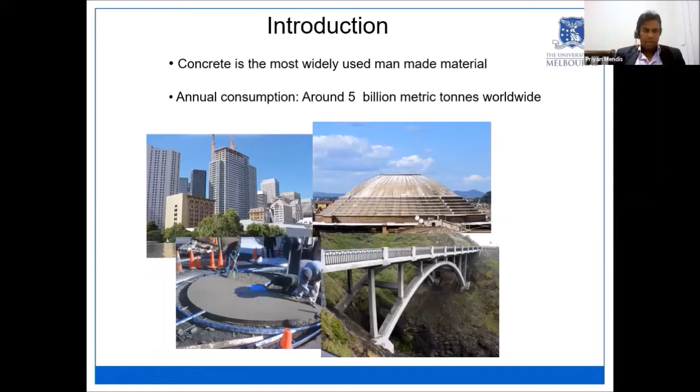Those who have visited Melbourne, that's a bit of the skyline. This changed a bit over the years, with a lot of tall buildings being built. I was quite fortunate to work on a number of tall buildings in Melbourne, and a few other experiences as well.

My introduction to high strength concrete came as a young engineer, when I had the opportunity to work with Ken Day, who was very close to Sri Lanka, having visited there a few times. I still consider him the best, practically the one who was practicing the best concrete technologies in the world. Unfortunately he passed away, but he wrote a book, Ready Mix Concrete - if you have a chance, read that. He taught me a lot of things about concrete technology.

With Petronas Tower, I wasn't heavily involved, but he got me involved, and that's how I came to work with foundation concrete mixes. So my introduction to this technology came a long time back. I was very fortunate to be working with him. Up to 80 MPa was used in Petronas Tower, one of the initial introductions of high strength concrete.

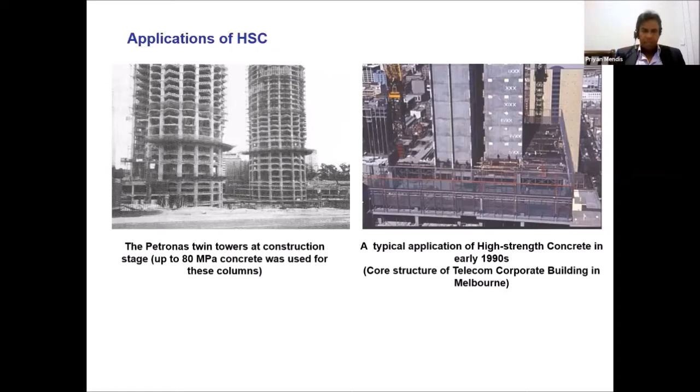In this case, I want to mention that in the 1950s... anyway, coming back to this - my introduction to Eureka Tower, I was part of the team. Although I was at the university, I was part of the Eureka team, and we designed concrete mixes and many other things. The developer was the concrete company, Grocon.

So we could really try out a lot of things there. This was another one of the first to really use this commercially. We can do it in the lab now - I've produced 200 to 400 MPa in the lab. That's not a problem, but commercially producing it is the issue. That's where I think we have done a lot of work as well.

Can everyone hear me? Yes, we can hear you. I think it was muted. Now it's okay, sorry. Yeah, sure, thank you.

I'll keep going. For Burj Khalifa, 100 MPa concrete was used. I'll share these slides so you don't need to take down anything - I'll pass them to Dr. Pradeep and Mr. Nandana. The 100 MPa microsilica self-compacting concrete was used a long time back for Burj Khalifa. I'll leave the details if you have questions, we'll discuss later - I know Thushara also has a couple of slides on the Burj Khalifa.

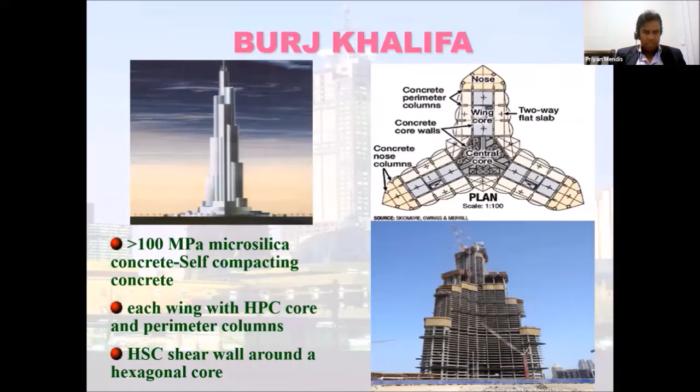My work was mainly being part of the team designing these columns, very high strength concrete columns, designed for about 80 to 100 MPa, but the actual strength measured was about 140. I'll briefly touch on the design methods used there.

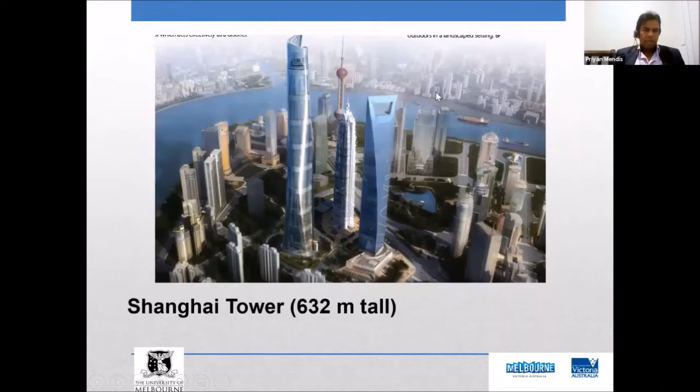Shanghai Tower was a key one, the second tallest building in the world at 632 meters tall. We worked with Shanghai Construction Corporation - Mr. Dong, my good friend, was in charge of the whole project from Shanghai Construction Corporation. This is a twisted structure, 632 meters. We had a project on pumping concrete together, more of an R&D joint project, and that's where it topped up at 506.9 meters - I was fortunate to be there.

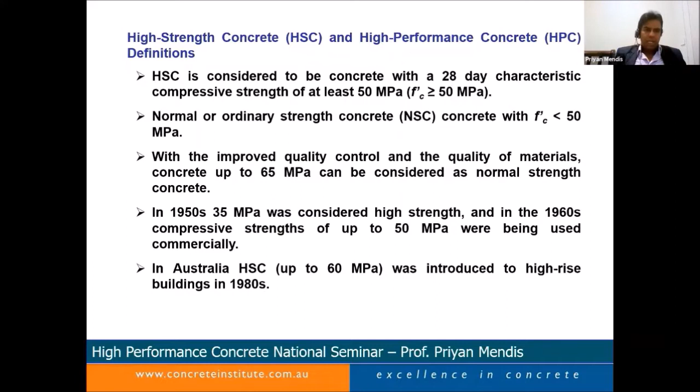So high strength concrete, again, the goalposts are changing now, but this is a nice definition. Compressive strength more than 50 MPa is high strength concrete, very high strength is 100 MPa, normal strength is less than 50 MPa. So we're talking about even ultra high strength concrete. Dr. Thushara also has some slides on that. Ultra means we could be 150 MPa, 200 MPa. So there's no really rigid definition for ultra high strength concrete.

It's really, let's say, very high strength concrete beyond 100 MPa. Our code changed to 120 MPa. Now, that's something I led a committee in Australia to change the code in 2000. We went to 65 MPa in 2001, in 2009 we changed it to a little bit more than 100, and then 120 is in 2018. Now we are even going beyond that. I think the Australian code is the only one covering very high strength concrete. The American code doesn't have any strength limit. So the same code can be used for all strengths, but that's not been modified for high strength concrete.

ACI 363 committee is the one - I attended sessions this time in America - that's where the high strength concrete committee is. We discussed a lot of things in that particular committee, so I can talk about the world scene that way.

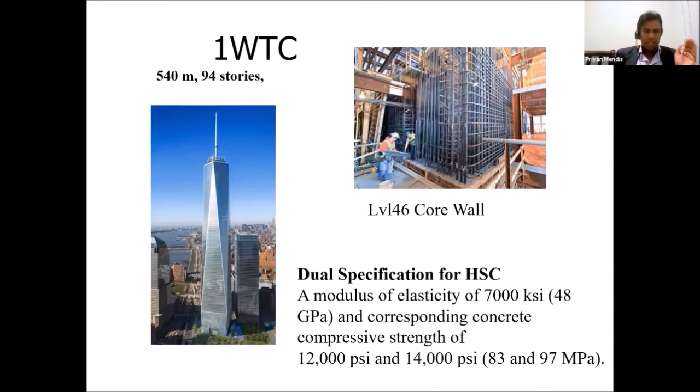We are looking at - I'll skip this definition a bit, I will share that. Anyway, don't forget about the basic knowledge, I'm not going to go through this. Think about good aggregates, transportation, mixing - that is vital for high performance concrete. Don't forget about the basics. Always think about concrete as a material, cement and water mix, paste. Paste is like a glue, gluing the aggregates together.

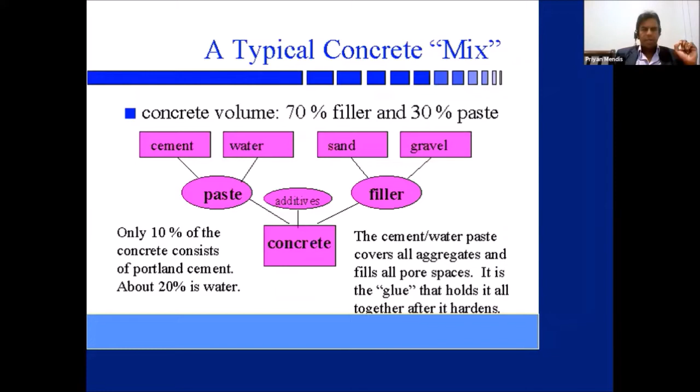And then you will understand how to make very good high strength concrete, high performance concrete. Look at the basics - this is where my first lessons of concrete come in. So just remember, cement paste is there, and superplasticizer is an ingredient which is really one of the best inventions of the last century in our construction area - the superplasticizers - and that will really help with these pozzolanic admixtures. What are pozzolans? They will add to the equation. I will not go into the technology equations, we are just briefly covering this.

Pozzolans means it will really have the SiO2, silicon dioxide, mixed with the calcium hydroxide, a byproduct of the concrete hydration reaction, and make a bit more CSH. So that is what pozzolans are - the pozzolanic reaction. So when you have pozzolans, my advice is always use superplasticizers as well, because that really will add to that.

Now there's a good question asked by Mr. Priyant, a structural engineer - how can we contribute to sustainable development goals? So yes, very much sustainability is coming in a big way.

I will talk about sustainability in two ways, though I'll be very brief today. We have to understand sustainability coming in two ways. One is where we are using waste materials, even fly ash, slag, silica fumes, waste materials in concrete. Every concrete now will have a fly ash component, in Australia about 20-30% fly ash.

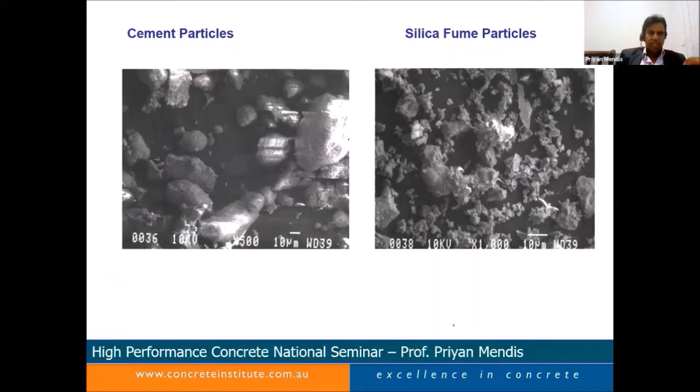Now, think about cement particles - silica fume particles are very small. So to make high strength concrete beyond about 80 MPa, it's good to use silica fume type of material. They are all byproducts, waste products, and smaller than cement. Fly ash can be slightly bigger, but it depends on the properties.

This is a very quick one where I want to allow Thushara also to talk a bit more - ease of placement, compaction, early age strength, long-term strength, permeability, modulus of elasticity, shrinkage, creep. I'll give some examples very quickly from my experience, to show that high strength concrete is not the only thing.

I was asked to help with the Commonwealth Games pool in Melbourne at that time, with the diving board. When it was designed, I helped them put in 65 MPa concrete a long time back. That was just to get the modulus of elasticity so that vibration is reduced for that diving board. So it's not for strength that we used high strength concrete.

Another example is that I was, in fact, asked to help with the Sydney airport. Those who fly there will see a seawall there.

The seawall, it is not about the strength. Their requirement was to have 1,000 coulombs, the chloride resistance, durability issue. So it was designed for that rather than strength. Obviously high strength concrete gives better properties, but it is not just strength.

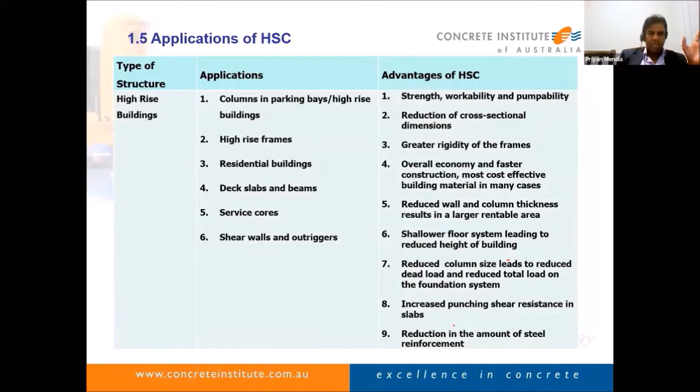That leads to the statement, don't read anything from here, but I'll just say high strength concrete is a high performance concrete. But high performance concrete can be many other things in this list. I'll share these applications, I'm not going to talk about all of that today. I've named applications of high strength concrete in many slides here. I'm not going to read all of that, but I will share these slides. Many applications we can think about.

That's where structural engineering comes in. Structural engineers are the ones who can understand, and of course other engineers too, it's extremely important to understand the applications. It can be bridges, especially high strength concrete columns in tall buildings. Remember, it's not just for that. Sometimes we use high strength concrete to reduce deflections, because the elastic modulus increases and the deflection reduces. So as I said, many other applications when you talk about high performance concrete.

I will not go into this, but pozzolanic materials are becoming very popular, sustainable materials. Even in the green building rating system in Sri Lanka, there's recognition for all that. I had to mention this metro tunnel, a big tunnel happening in Melbourne, big infrastructure project. In the specifications for the metro tunnel, they say 44% of the cement has to be replaced. That's where the world is going. You can't just say 'just using cement' anymore. Of course the cement companies are all supporting this change with blended cements and many other things now. That's where it's moving on the sustainability side.

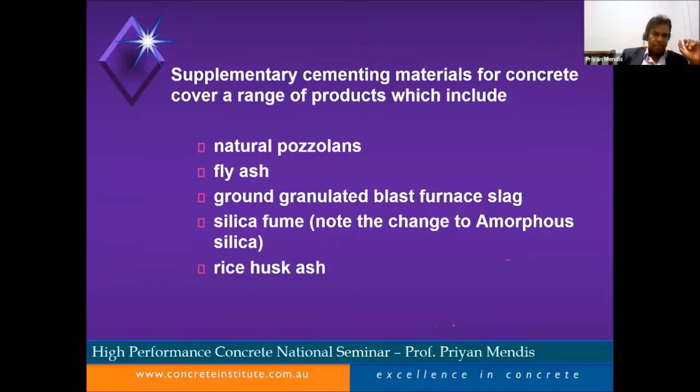Super plasticizers, I will not spend time on this. For example, polycarboxylate ethers came in, I'd say 15 years back, could be slightly more. But they are key for many things, new types of PCs. Again, superplasticizers are very key. On the research side, we do a lot.

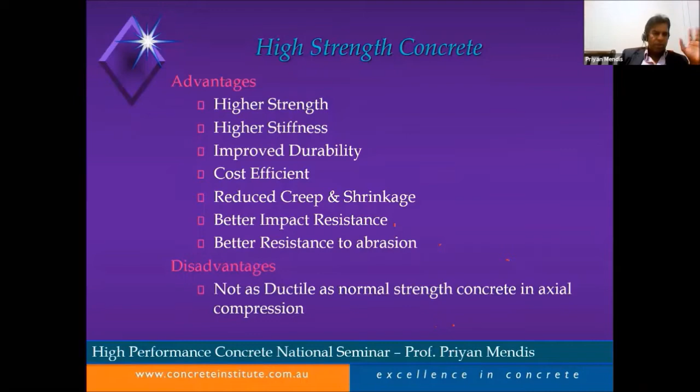High strength concrete, go very quickly. High strength, stiffness, durability, we can talk about a lot. But more important is the stress-strain curve: stress on the y-axis, strain on the x-axis. Only structural engineers can do this. If you think of the curves, they're parabolic and ductile for low strength. When it comes to high strength, they're very brittle.

So what do we do as engineers? When designing columns, we can put a bit more stirrups, lateral reinforcement, to confine the concrete. That will make it a bit more ductile. What I've done in Burj Khalifa and a number of other buildings is made some recommendations to reduce this issue. Since then it has come into the codes as well. I'm one of the first to come up with these design methods.

RHA, rice husk ash, is something I've done a lot of work on. I'm happy to even talk about it offline. The only problem with rice husk ash, that's why it's not coming to the world, is that it has to be ground and properly burnt. So it's a bit expensive, the processing. That's why RHA is not coming. Fly ash directly comes out as a waste product, so not much processing cost. But rice husk ash, you need to process it. That's why, although even at that time I did a bit of work for rice growers in Australia as well, rice ash is not popular.

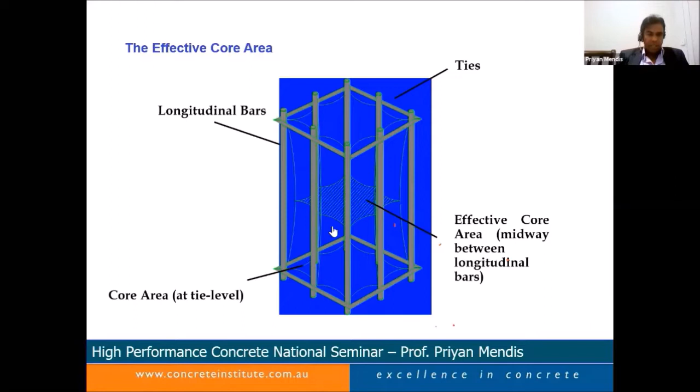So coming back to this, reduce the spacing between stirrups and you'll find improved confinement. That's where I am really improving the ductility. Stress on the y-axis, strain, and these are the confinement stress levels. When you increase the confinement stress, it becomes really more ductile. Having 1 MPa is where the stirrup spacing can be reduced. Practically, it's about 1 MPa.

I'll show you a reference where you can get more information on how to calculate the confinement stress. Refer to AS3600, the Australian code - that's the only code in the world that gives more detail. Model code, Euro code, also give a little more detail on finding this confinement stress. You can use the confining stress to design now - the design method is included in the Australian code as well. So if you want to design high strength concrete columns, look at AS3600. That's the best reference to do that.

Now, this is very early stages, before all the codes came.

Actually, very good question from Mr. Delina, asking does the confinement requirement increase with higher strength? The answer is yes, because it becomes a bit more brittle. At the moment, concrete strength is not considered to be a parameter for confinement - it's just based on the idea that more confinement is needed for higher strengths. But what we do is very crudely say beyond 50 MPa, use confinement stress at a particular level. So this does, of course, have the concrete strength factored in.

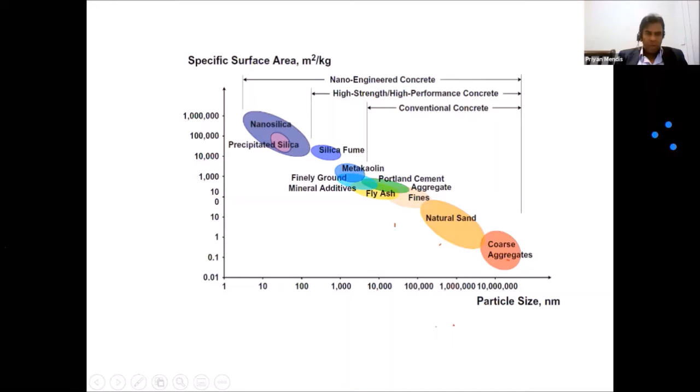I'll leave that to another time to talk about, and I'll skip some of those slides to really show why structural engineering is so important - why structural engineers had to be involved with everything.

This is some work we did - I was also part of it - around 96, 97, somewhere there, we started this reactive powder concrete, ultra high strength concrete, with no aggregates. Aggregate is a weakness, so as engineers we have to understand where the weak points are. Normally weakness comes around the aggregates, and that's where the weakness is. So that interface we call the ITZ zone, the interfacial transition zone.

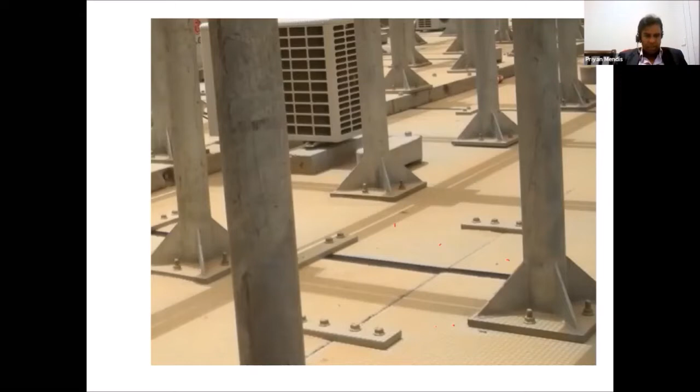This is work one of my PhD students did. It was transported to one of the very critical Australian embassies in the world - you may even guess where it is, where the Iran-Iraq war was. So to Iraq, Baghdad embassy, it was transported at that time to protect the embassy, using the mix that we designed. We used about 180 MPa, no large aggregates, and it protected the embassy, the top. So it's a really good application of the early stages of ultra high strength concrete - no aggregates, no large coarse aggregates. So we could really do that.

Now, nano materials - I'm not talking today, I'll leave it to another day - but nanosilica is the one practically, I think, that can be used.

That's where Dr. Thushara can talk about this. His PhD was also on nanosilica.

Anyway, now this is what you have to think about. We can increase and improve the paste to make high performance concrete, reducing the water cement ratio to levels of 0.2, even a little higher. You have to use a superplasticizer to make it workable.

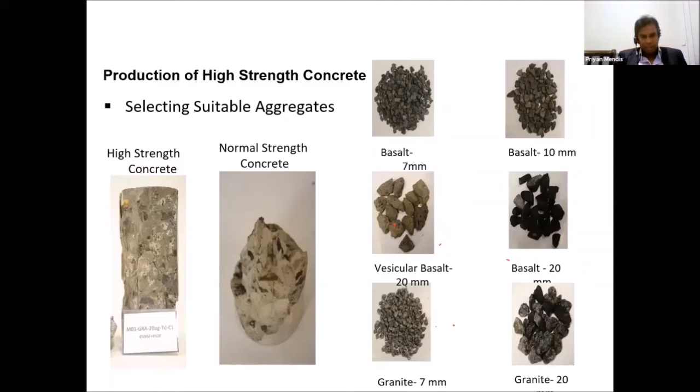But aggregates - that's the work we got an award for, where at 150 MPa we showed the importance of aggregates. High strength concrete breaks through the aggregates. Paste is very strong, but then it breaks through the aggregates. Because of that, we had to make aggregates strong as well if you want very high strength concrete. So remember that - people around the world blindly try to improve just the paste, but that's not enough. You need proper aggregates to really achieve very high strength. So even in Sri Lanka, if you're designing high performance concrete mixes, look at the aggregates very closely.

And sustainability - as a good question was asked, we really need to get into high performance, sustainable concrete. The UN goals fit into all of this as materials, and we also get green points if we do that.

This is one of the key buildings, a 6-star rating in Australia - 20% of the aggregates were recycled, cement was replaced, steel was recycled. This is where the world is moving. I won't spend too much time on that, so I'll skip it.

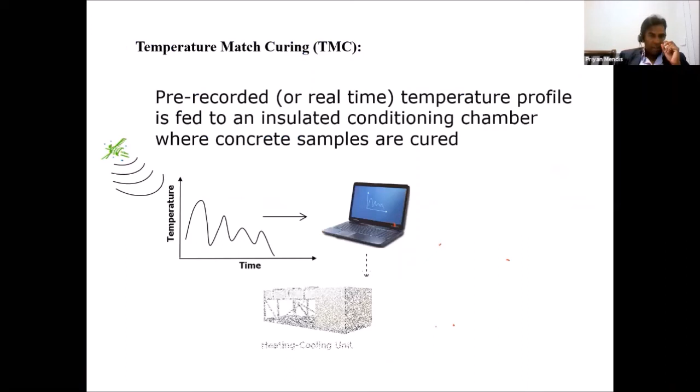Early age - we talked about the importance of that already, so I'll go to the other slides. Pumping is another key one, just touching on that - remember pumping. I want to show one slide from Burj Khalifa.

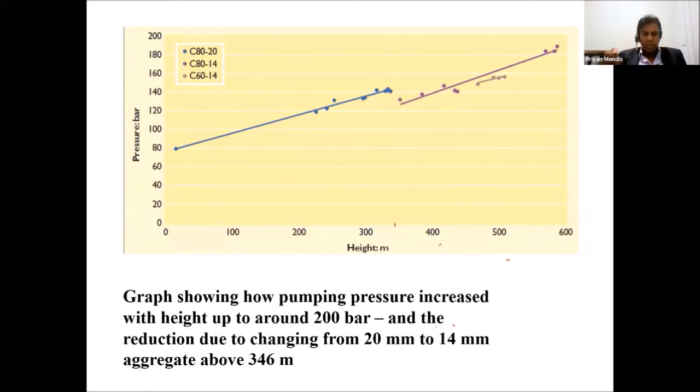So pumpability is a key one - we'll see more and more of this in high performance concrete. That's from Burj Khalifa. I'll skip the other types of concrete because Tushar will touch on fiber reinforced concrete. Lightweight concrete is quite important too.

Again, you will have these slides, but you can read them. Tushar is going to talk about lightweight concrete. Modular construction is another area - in the future, construction will be done in the factory and then brought to the site. It'll be all prefabricated in 10 years, that's my estimate, with very little site work. We'll still need some on-site concreting, but lots of things will be done in the factory.

So lightweight concrete is key because you have to lift these elements up - you will see more and more of this. These are things we as engineers have to get involved in. We can't just leave it to others.

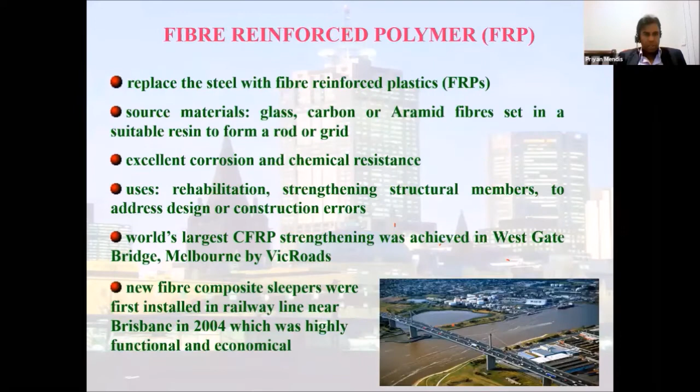I'll skip geopolymer concrete, not going to talk about this today. Actually, Mr. Ravi Nisanga could be here - him and myself did a geopolymer trial in Sri Lanka a long time back, maybe 5 to 10 years ago. We introduced geopolymer concrete as a trial, but I think it needs to pick up a bit more.

I'll skip that, but I want to mention one thing - the pozzolanic reaction we talked about, and where HPC is moving. As structural engineers, we have to understand all these investigations on how to make high performance concrete, so we need to understand some testing. Right now we're talking about cube testing, workability slump testing, all that, but in the future we will think about higher level tests.

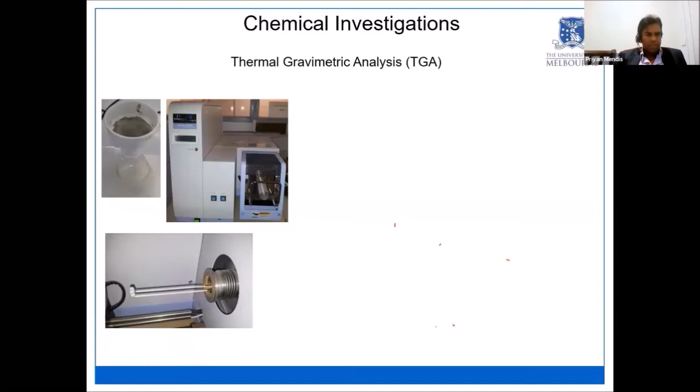TGA is a very effective test to measure performance - thermal gravimetric analysis. TGA, and I won't go into detail, but X-ray diffraction too, to understand more about the material - that's where we'll see things going in the future. If we can do this through microscopes, we can measure it. Also, when you use very high strength concrete, you'll see some thermal cracks as well.

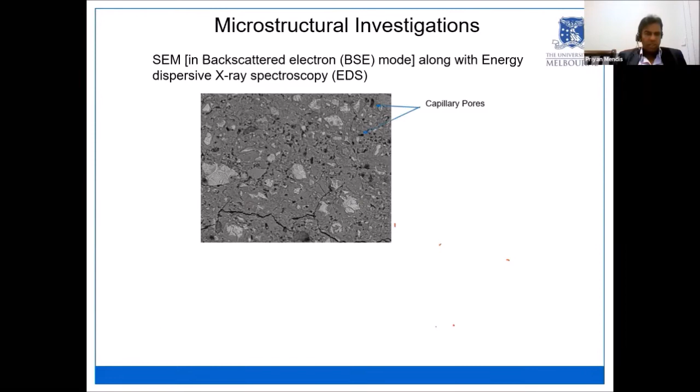So some micro cracks, you need to be conscious about that. I'm just giving an overview, not details just now, but you can ask questions.

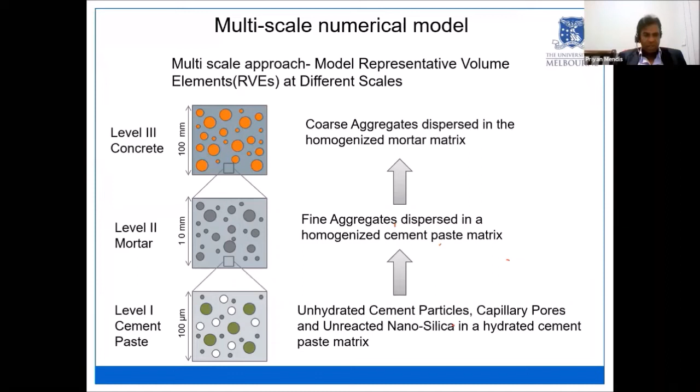Finally, I'll skip the modeling. Modeling needs to be, that's why we are spending a lot of time. I got a very good couple of students from Sri Lanka heavily involved in modeling, actually three students. And that's where we have a big gap now. In the lab we may know how to do things, but how to model them is quite important, because it's important to model everything these days. That's where multi-scale numerical modeling comes in, and we have good computers now. I didn't have those when I was studying, but now we've got very high performance computers, not concrete. So when I talk about HPC in some audiences, they think it's high performance computers. Sorry, same name. But anyway, computers are quite important, so we can do some numerical modeling. If you want any details, I've even got PhD students who have done this work and continue it. So I will skip some of the modeling.

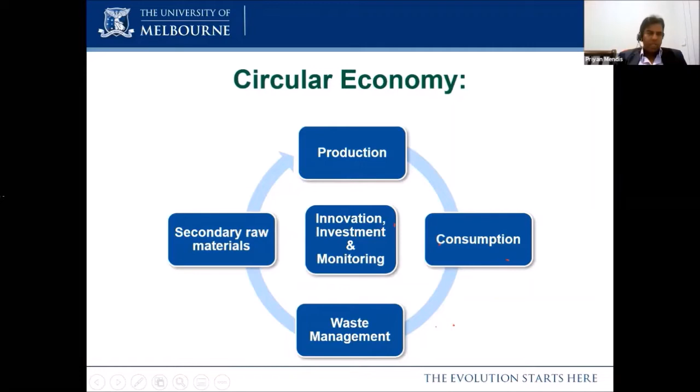That's where the sustainability question was asked. Now, the circular economy word will come in more and more, where production and consumption, that is demand and consumption, and waste management - that's where I spend a lot of time now. And the raw materials - we are running out of raw materials, so we have to use some of these waste materials more, and complete the circular economy. That's a key word you will hear more and more in the future, next decade. That's where we are doing some work.

We're trying to use municipal waste as a key. We are wasting, throwing things out, but we want to use them in really valuable products. I call it upcycling. I covered a bit in that talk last February, but happy to answer questions. We are trying all sorts of things put into the concrete - concrete is the best place, but we need to understand the durability, all that. Otherwise problems will come; we can't just throw them in and think it's all right. So waste paper, cardboard, aluminium, plastics, glass - all that we are doing work trying to put into making high performance concrete.

For example, if you're using plastics, we think it will improve the tensile strength. So it's like a waste material, but when you throw it in, we think it will improve the plastic properties of concrete, and it can absorb more energy. It'll reduce shrinkage cracking and early age cracking as well. So plastics, although a waste material, will really be very useful.

Take paper - we are thinking the cellulose fiber can improve things, so rather than using other fibers, you can use that paper to really reduce early age cracking, especially used in concrete roads and all that. So these are waste materials. Tires - we spend lots of tires. Why not? We know how we can use it with concrete. So that's going to come in the next decade.

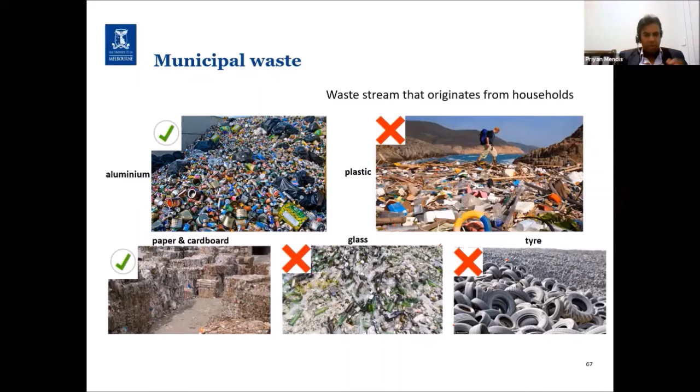So waste glass - I will not touch that, but we are doing lots of work trying to put glass in. We are trying to even put glass in concrete for this very important metro tunnel project, some of the temporary structures. You will hear a lot. I mentioned plastics, glass, even food is a big material - we want to reduce food waste, so we are trying to see whether anything can be done. No, concrete is the first thing which comes to mind to use these waste materials. So you'll hear a lot on that, the glass to waste tires - these are all lots of work we have also done.

So any questions you have later on, I'm happy to answer. I take a long time, but before I finish off, I will now give very quick answers to these questions. So Mr. Priyant is again asking whether the aggregate strength is more important.

Sri Lanka aggregates have higher strength, but do you think we use it as engineers as a means of sustainable development? Yes, of course, that's a very important one. We are thinking of using some even recycled concrete aggregates now to really improve the sustainability.

We shouldn't be wasting anything. Rather than using raw materials, of course we had to really use quarrying, but we will run out of quarries and aggregates. We know we are already running out of river sand. So now manufactured sand, and even sea sand, is being tried out in Sri Lanka. Those things help make it high performance, but we had to redefine it to make it a bit more sustainable.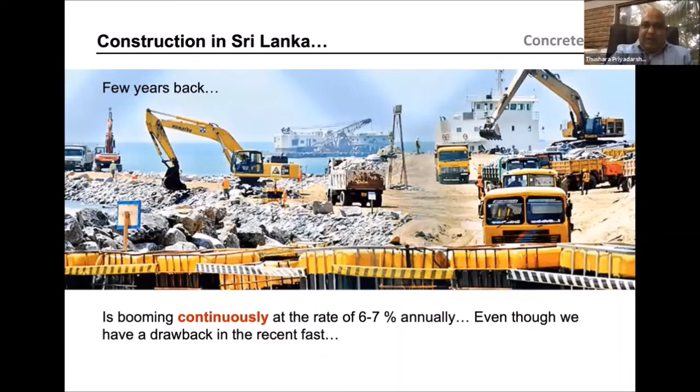So if we ask ourselves, in Sri Lanka a few years back this was the situation. Even when I worked in the cement industry, my CEO always used to say whatever said and done in this country, cement growth is 6 to 7% annually. So in any situation, cement demand is growing, construction is booming. This is a few years back, and of course the port city will look like this in future.

This is where we need to apply our knowledge in building this, because sometimes building and maintenance of these structures will be really costly for us. Some countries at the moment are experiencing real difficulties in maintaining it.

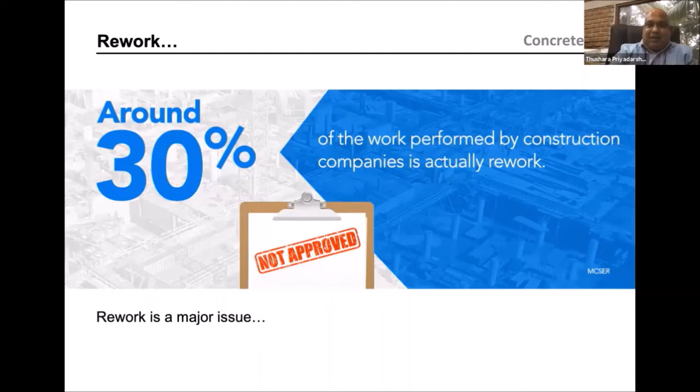The major issue in the world is most of the work being done, around 30%, this is why the McKinsey survey shows 30% of the work is rework actually. So you have to do 30% extra work when you do anything in construction. So rework is the major issue.

Second, nearly 50% of construction companies report spending 1% or less on technology annually, because construction companies don't invest much on technology. And as Asians also, sometimes we are spending quite low in our particular field. So this is one other critical area that we need to work on.

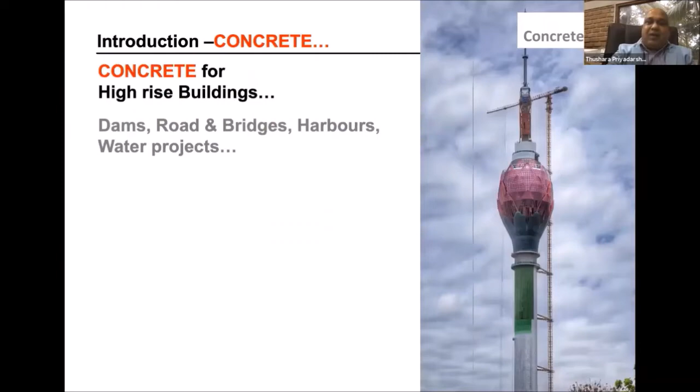So I'll skip this. Steel is really good for long span buildings, and concrete of course is used for high-rise buildings, roads, bridges, harbors, water projects, etc.

Why is this concrete so popular? Mainly, it can achieve very high strength, meaning it can support heavy loads.

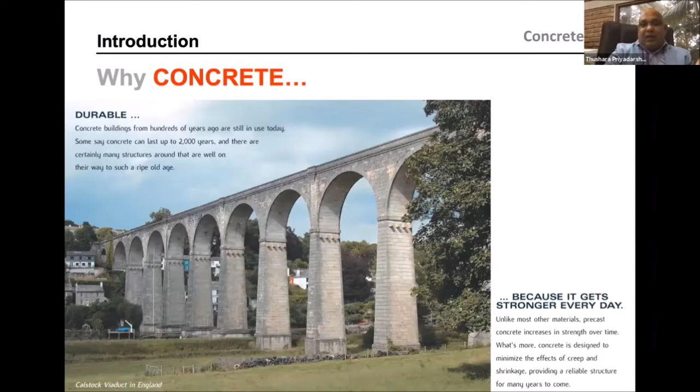It's also very much durable, because it's used to say that concrete gets stronger every day. Actually, if you handle concrete properly, it can last 100 or 1,000 years sometimes based on your design and other factors. It's also a structurally very efficient material, which means it's easier to go high and it protects against fire.

So it's really good for fire, because compared to some other materials, even after the 9/11 attack, many people thought of using concrete instead of some other material.

It can absorb vibration and others really well, good for high damp structures, and resists chemical attack, meaning it does not rust. Concrete itself does not rust, but there are some durability concerns to be considered. It can also absorb impact and protects against blast compared to most other materials.

We could talk a lot more on this, we can continue. It can be made into any shape, so customization is quite easy. Because of all these properties, and there are a lot of others,

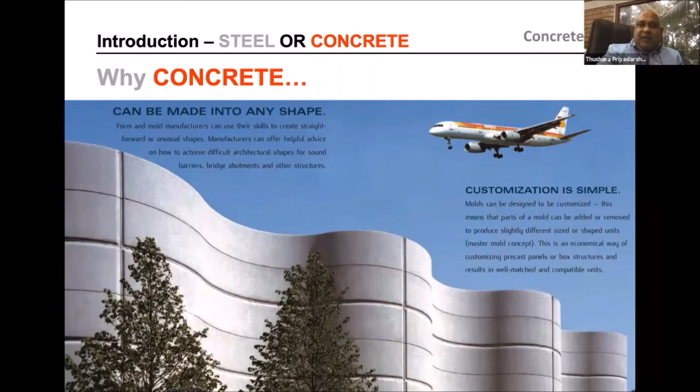concrete is really popular in the world, but as engineers, you should design your concrete to match expected performance. This is where we have the challenge, because unlike most other materials which you get from factories with very high quality standards, you produce concrete mostly at site or in a ready mix plant under very site-specific conditions. This is where knowledge on high performance concrete and its application will play a great role.

So with that introduction, I move into high performance concrete. The Professor talked a lot on this, just as an initiation. So if we ask a question, what is conventional concrete, and what is high strength or high performance concrete, or what are nano engineered concrete?

Conventional concrete used to have just coarse aggregate, sand, cement, water, maybe a little bit of some other material. But when it comes to high performance concrete, you have fly ash, silica fume, and some other finely ground minerals, which are not much used in Sri Lanka at the moment, but I think it will become popular. And when it comes to the nano level, people started to add nano materials into concrete, like nano silica or any other nano material, such as nano titanium dioxide.

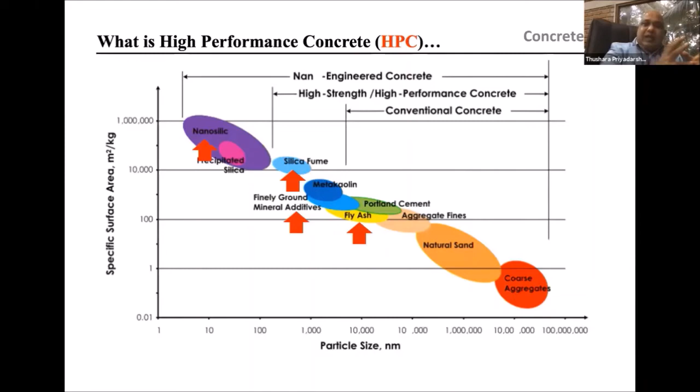So when it comes to sustainability, many people talk about it because of two things. Cement is a very bulk production that you need in large amounts in construction. And if you take cement production in the world, it produces 5 to 7% of man-made CO2 in the world.

Second, the amount of material available for making concrete or cement is depleting continuously, so it is going down. So you need some replacement material. But on the other hand, you can enhance your properties by adding all these materials.

The Professor talked about these materials. Simply, it can be fly ash, pozzolana, slag, or any other burnt shale material, or rice ash, or at the next level, silica fume, or it can be like nanosilica. So our question is, how much fly ash can we add into our concrete?

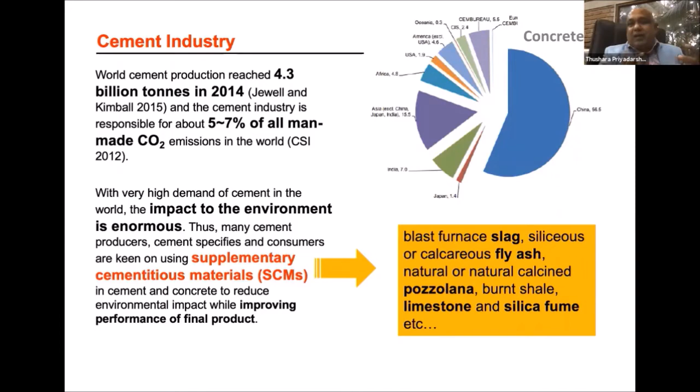How much slag can we add into our concrete? How much nanosilica or microsilica would be? At least we should know by thumb rule how much we can add to concrete and how we can select these materials. I don't want to discuss much about it, but if you want more detail, you can refer to BS EN 197-1 cement standard, which talks about 27 common types of cement. In Sri Lanka, we have 4 types of cement, but only 3 types are produced at the moment and used in the industry. Now our question is how we can add this material into cement or concrete, where we can add it, and how we can do it. This is the critical question.

So, fly ash - how can you add it? Can you add it into cement? Can you add it into concrete? Let's see the cement production process very briefly.

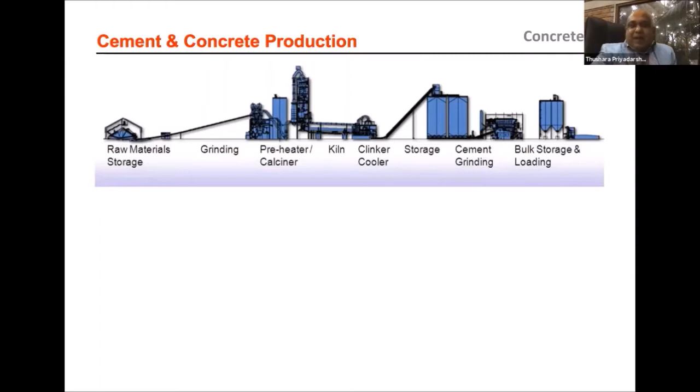This is cement production. You have raw material, and you have to grind it, then preheat it. Then this is the heart of cement production, called the kiln. Out of that, you get a material called clinker. When you add gypsum to that, you call it OPC. And when you add some other material like fly ash or other things - in Sri Lanka you can add up to 35% - it's called PPC, or in Sri Lanka, BHC, blended hydraulic cement. Another type is Portland limestone cement, PLC. You can add 20% limestone into your cement.

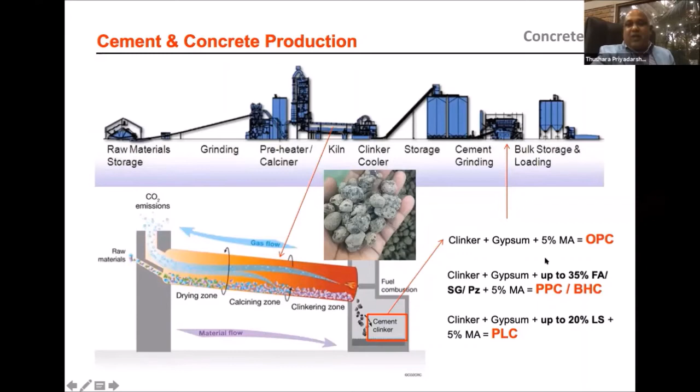So whenever you buy any cement bag from any place in the country, you get one of these: either OPC, PPC, or PLC. This I have plotted to the EN standard, but I don't want to talk much about it.

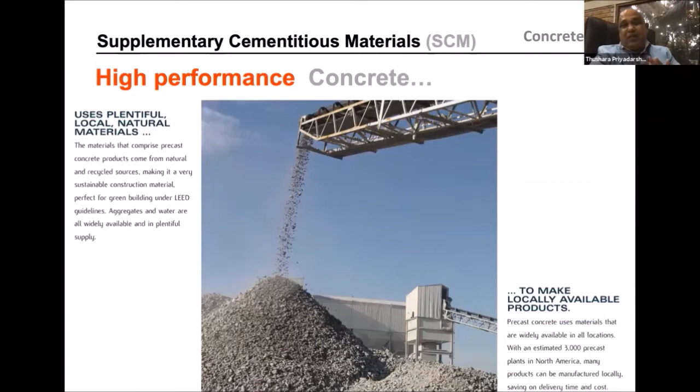So, supplementary cementitious material - we have a common word for anything we add instead of cement or as a complementary material for cement. We call it supplementary cementitious material, SCM. So what we've talked about so far - fly ash, slag, microsilica - all come into that category. These usually come from plenty of local natural materials, or should be a byproduct of another industry, because sometimes it is not easy to manufacture those, as it will not be economical. So most of these come as byproducts from other industries.

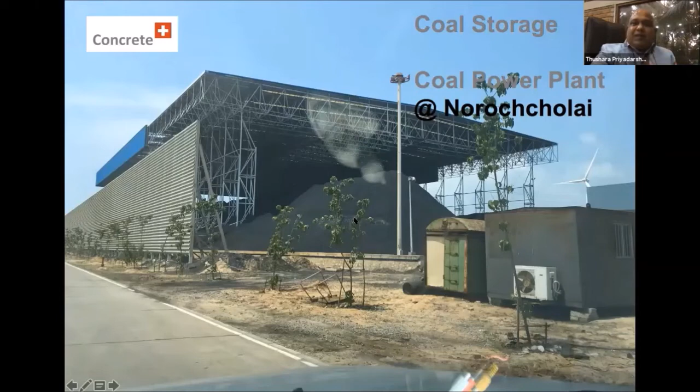A very good example is Norochcholai power plant. This is Norochcholai power plant, and this is the coal used for the coal power plant. During the process, you get 2 types of ash. One which comes down at the bottom is called bottom ash. The one that flies is called fly ash. So these are the basic 2 types of ash you get from the coal plant. Bottom ash - in Sri Lanka, no one uses it at the moment. But fly ash - we have really good fly ash in Sri Lanka. Those are class F fly ash. There are 2 types of fly ash, as you may be aware: class C and class F.

If I just show you this photo - this is bottom ash in Norochcholai. I took this many years back. We have a heap of bottom ash. I think as engineers, it is time for us to think about using this, because I always used to tell people this is a gold mine for us. We should use it as engineers somewhere.

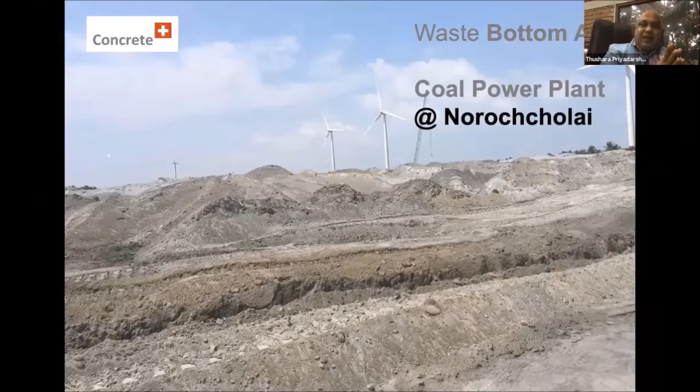So my earlier question was - now you are aware that we can add many materials into either cement or concrete, such as slag, fly ash, pozzolana, or limestone. These materials are divided broadly into three categories. One is called latent hydraulic - this is slag, meaning with water you can make them react. The second is called pozzolanic material - all fly ash, natural and artificial pozzolana, rice husk ash, all come into this pozzolanic category. There you need an activator to activate it, probably using it with cement. The third type is called inert, the filler - mainly like limestone, acting as a filler, but with very limited reaction only. So these are the three types of material. Then we will see how much we should add, how we should do it, and other details.

The amount of these materials that can be added into our concrete mainly depends on their chemical and physical parameters. If you see, slag is like aggregate, so when you add it, of course the workability goes down.

This type of material, if you add into your concrete, of course this can be same size as cement, but when you see from a closer view, it's like aggregate. But the flyash is spherical, so wherever you add flyash, you have very good workability. So wherever you want workability, in other sense, you better add flyash.

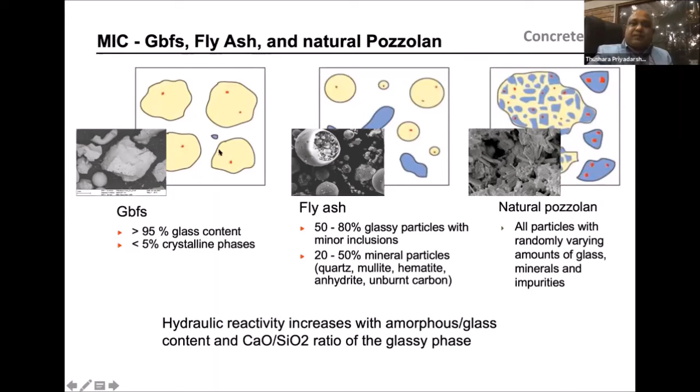So all this material, as I mentioned, when you add, you should know their chemical parameters, you should know their physical parameters. Then you can decide which material, up to which level, you can add it.

If you want to go into depth, of course there are a lot of technologies, like we did the SEM test today. So you can go into the material and see how it works. This is a very small concrete particle. Then you can gold plate it, put into the SEM, and see how the concrete looks like.

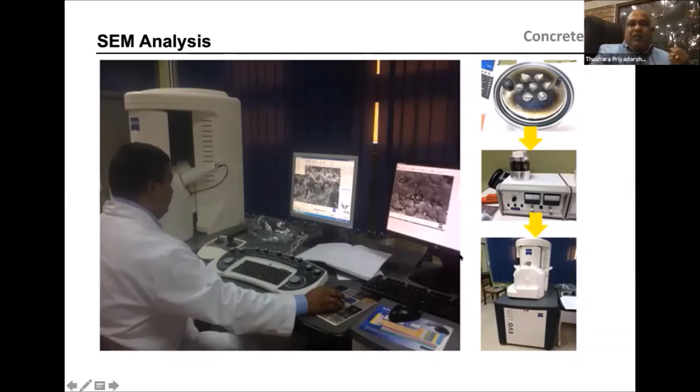So this is like a jungle. People who know this, it's like an X-ray. So everyone cannot understand, but of course an expert can understand what each material is and how it works.

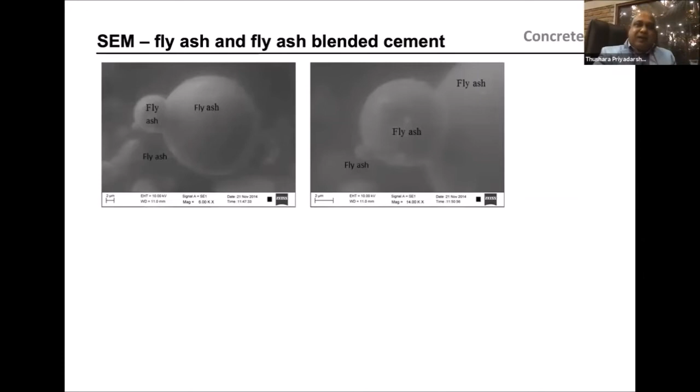As I previously mentioned, fly ash is very much spherical in shape. Wherever you add it, the overall system workability will go up. This shows that even though we say whatever said and done, for a particular application you have to use these materials together, and you have to do trial mixes at the lab, probably at site, then you use it for your particular application.

So with that knowledge, because the professor also talked a lot about it, I will move into concrete applications in major projects. I'll spend a little more time here because this is where we have to apply our material in concrete. This is a quite interesting example.

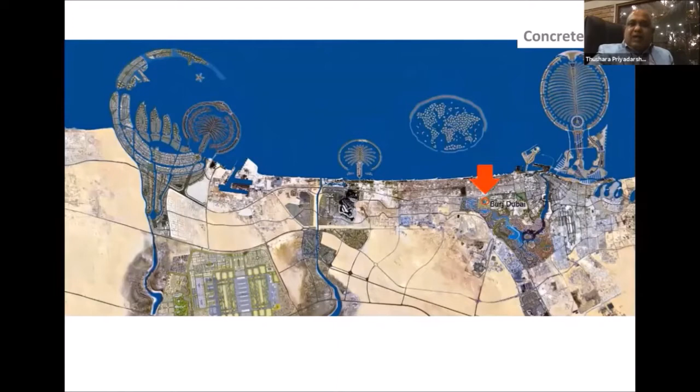This is Burj Dubai, the Burj Khalifa. You can see the environment is really aggressive. It's always used to say it's the World Concrete Lab. So here, let's see how they have used this material nicely, how they have used it.

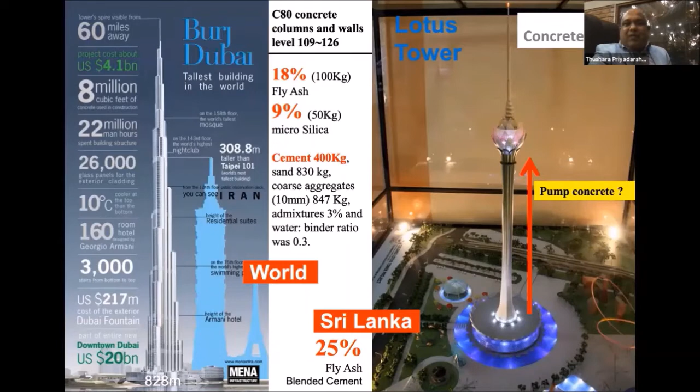For this type of building, the Lotus Tower for us - Mr. Shiromal is here, so he has very good experience on it - we need to pump concrete. So there's no point making very good concrete at the bottom, but you have to pump it 300 meters in Sri Lanka, and in Burj Dubai I think more than 500, 700 meters. You have to pump it.

Second, you have to take care of the heat of hydration. How you manage heat of hydration is in mass pouring, especially pile cap areas, can be even bigger retaining walls and others. So heat of hydration needs to be managed. Then in the main columns and others, strength matters. So how do you select your material to match all these? It's using our knowledge in engineering.

For Lotus Tower, I can remember they used 25% fly ash blended cement for most of the applications in general, because it's really good for heat of hydration. You can get the required strength, and it is really good for pumpability.

On the other hand, when you see the Burj Dubai, this is just one example of using this material, so I'll just go into it. As a thumb rule, it says that if you want durability, you have to use around 25 to 30% of pozzolanic material. I think the professor will share more. Like fly ash, pozzolana - it's good to have 25% of total cementitious material.

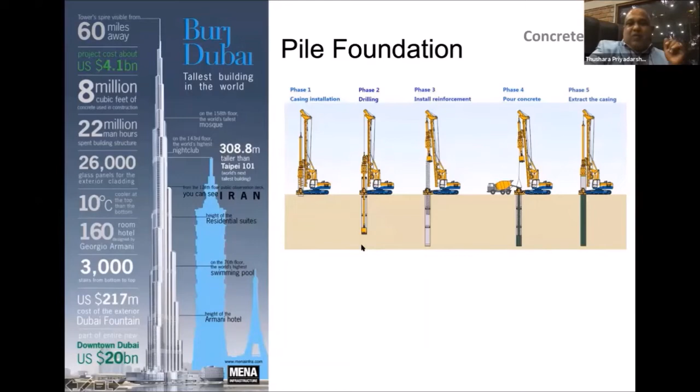As I mentioned, it depends highly on your requirement. But when you consider durability, it's always better to use at least 20-25% of pozzolanic material in it. So for the pile in this particular project, Burj Khalifa, they have used 23% fly ash plus 7% microsilica, meaning a total of 30% of cementitious material, except cement, as replacement has been used for piles.

So even you can use slag, this is up to you. But if you replace this with slag, usually it's said that you have to use double the amount of fly ash or pozzolanic material when you use slag.

So you will see the next example, pile cap or the retaining wall. In the retaining wall, it's a very big structure. Workability is not a critical issue because these are quite huge structures. Then you have a choice to go into either fly ash or slag. But when you consider durability concerns, probably fly ash has both good properties.

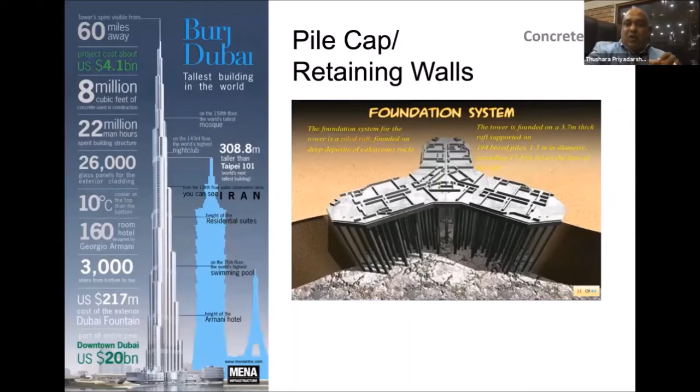Second, these are huge structures, then heat of hydration matters. In that case, if you have the option, go into slag-based cement, which allows more replacement of cement, and it will give a very slow heat gain - of course, very slow strength gain as well.

So probably some of you are aware - if not, this may be the first time you're seeing this type of mix: 57% slag, 7% microsilica, meaning 64% of cement replacement with other material. I'm sure most of you like ordinary Portland cement, but here we are replacing ordinary Portland cement - 57% with slag and 7% with microsilica.

So whether this is good or bad - actually the Burj Khalifa could have easily used ordinary Portland cement for this structure, they have enough money, and of course they invested a huge amount of money. But they used 57% slag because it's really good for high performance.

So let me remind you once again - I'll show you the complete mix design later. So we start from the pile: around 23% fly ash, 7% microsilica. Then we went to the pile cap: 57% slag, 7% microsilica.

Now we have walls, here we need more strength - this is the difference actually. Now you have to differentiate what you want, because for the pile you don't want that much strength, for the pile cap you don't want that much strength, but for the column you need probably the highest strength for your building. So here you should not go with fly ash at a very high level like 25% or 35% - it's better to be at 15-18%, then 9% microsilica. You add more microsilica to get more strength.

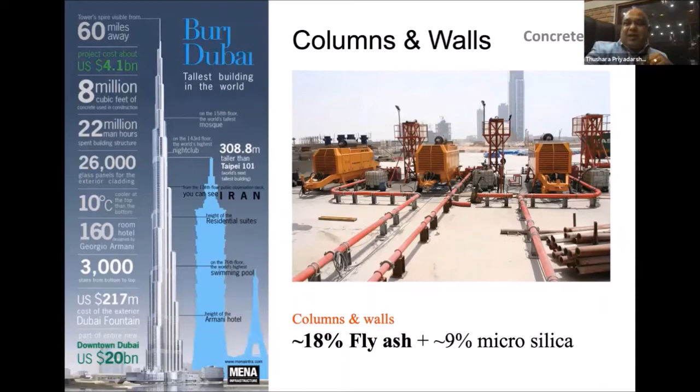So likewise, if you see the overall mix design of Burj Khalifa, this is part of the information. One thing you can see is the total cementitious material - not only cement - they maintained at 550, they didn't go beyond that because of durability. Then fly ash 12 to 24%, microsilica 5 to 9%, and slag 57%.

I think this is a very good thing, as engineers we should keep this in mind. These are the ranges that we can move within. So I'll move quickly - this is a complete mix design.

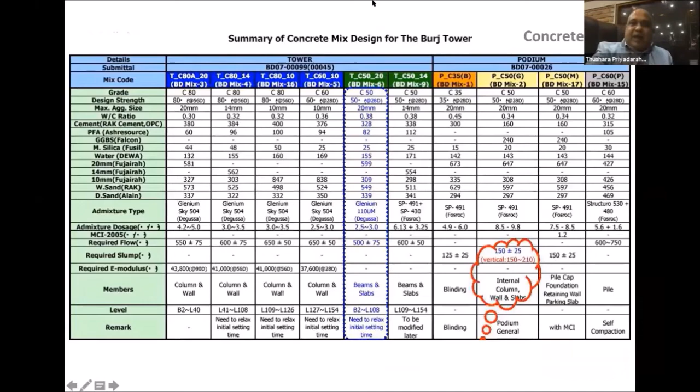You can get it even from Google - you can see how these mixes can be taken from Google.

So I move quickly - in Sri Lanka, mostly pile caps are done at around grade 40 concrete, columns will be grade 70 like that. So a very similar application can be done. I'm moving quite fast because I need to go quickly.

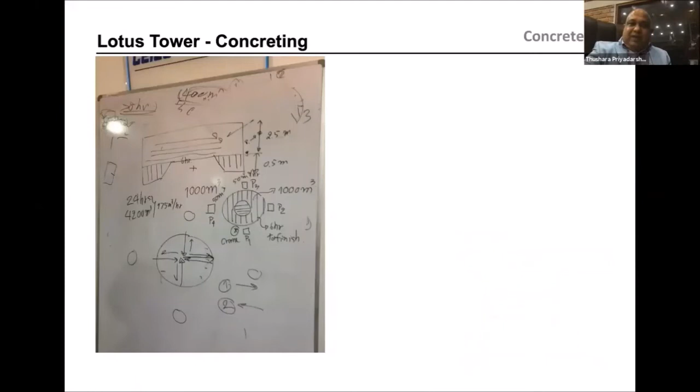So here I stop for a while - the Lotus Tower Foundation. We involved, actually the professionals are here, Professor Priyan, Mr...

Shiromal, all involved in this structure. This is where you need to be really worried about heat of hydration of the main foundation area.

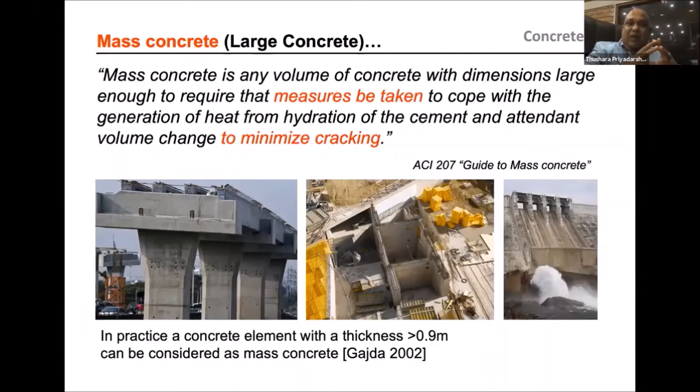So with large concreting or mass pouring, we have to consider two things. One, maximum temperature of the concrete should not go beyond, say, 70 to 75. And temperature gradient should be in the level of 20 to 25. Otherwise, there will be a lot of issues. If the temperature gradient is high, there will be surface cracks. If the overall temperature goes higher, there will be long-term durability issues, which can be very costly for us to repair.

So how you can cool down the material is quite easy. Probably the best way is to reduce the temperature of the concrete is to shade your aggregate. Or nitrogen cooling, which is not available in Sri Lanka as far as I know, could also be used, but it will be very costly.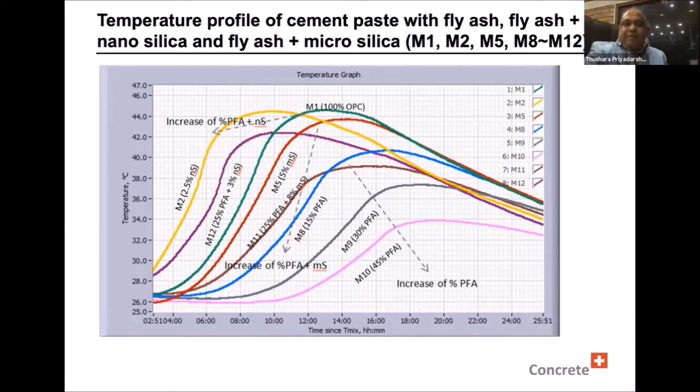So I'll move quickly because we can discuss any questions later.

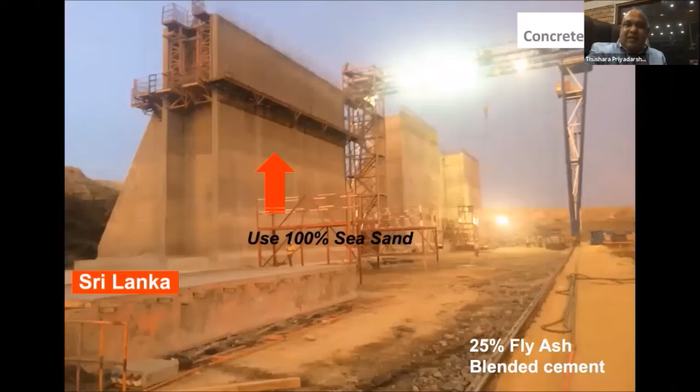So this type of material, this is Colombo South Port. They have used blended cement for this. And this is Hambantota Harbor. They have used not only blended cement, but as far as I know, they have used 100% sea sand for this structure.

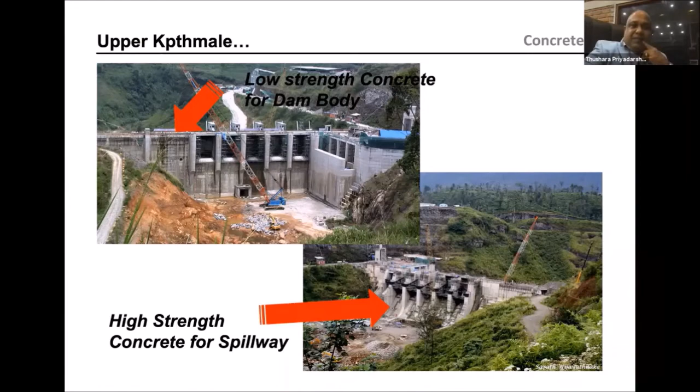And in a particular structure, concrete, high performance concrete will show different levels of performance. As an example, in a dam, very low strength is used for the dam body because you just need the weight of it. So you need quite low strength. But like in a spillway area, you need very high strength concrete. So here we should be very careful when you select cement or any other material. They should not give high strength actually, especially high early strength. Then you can use manufactured sand for applications.

So this is where you have more challenge. So you are not just asked to use blended cement, but you are asked to use blended cement with some other new material like manufactured sand. It can be sea sand. Always you have to perform particular mixes.

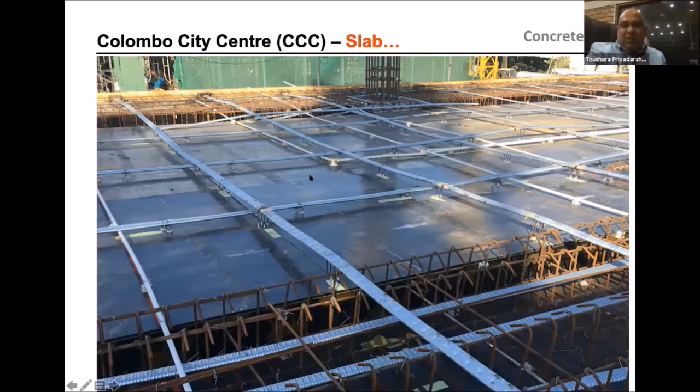So this is Colombo City Center. You can see, because this is your area, of course you know very well. So this is the only reinforcement that you use for your structure and how it looks like. But when you are really good in all this concrete or structural work, I think it will not be enough.

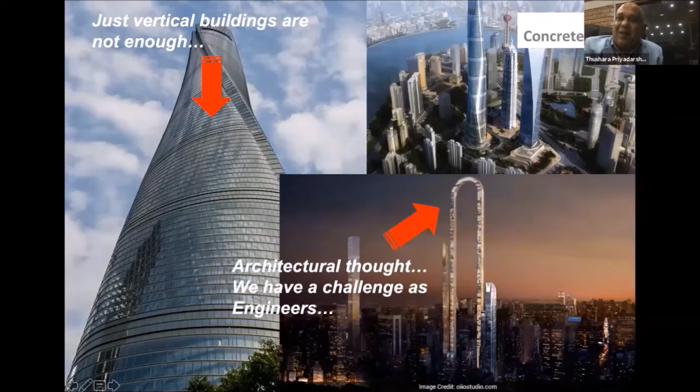Because then people ask you to rotate your building, twist your building. Some architects say, okay, probably we want this type of building in the future. So as engineers, it will be really hard for us to manage all this. So this is a classic example, Altair. Already we have the slant building. So not only the compressive strength, but other properties like flexural strength and modulus of elasticity all play a critical role.

So it can be precast, or it can be roller compacted concrete. It can be shotcrete, again precast. So you have a lot of things to play with. So with that, I'll come to the last part because we need to have discussion.

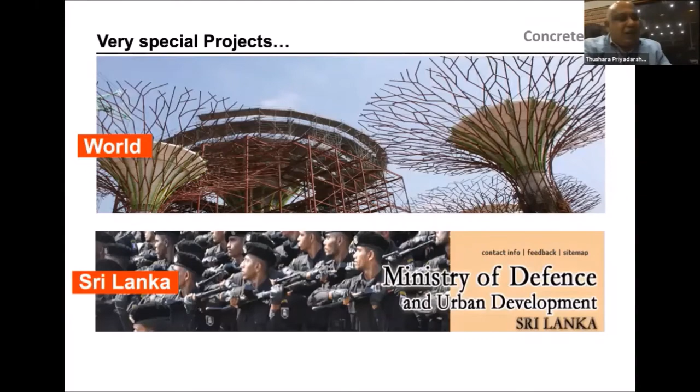Sustainability of this industry can be done in many different ways. People are talking about low carbon cement, it can be low carbon concrete. What you mainly have to do is have resource efficiency, alternative fuel, alternative raw material used, or novel cement. Energy efficiency should be maintained. So carbon reuse - people are talking about, can you use this carbon dioxide back in concrete?

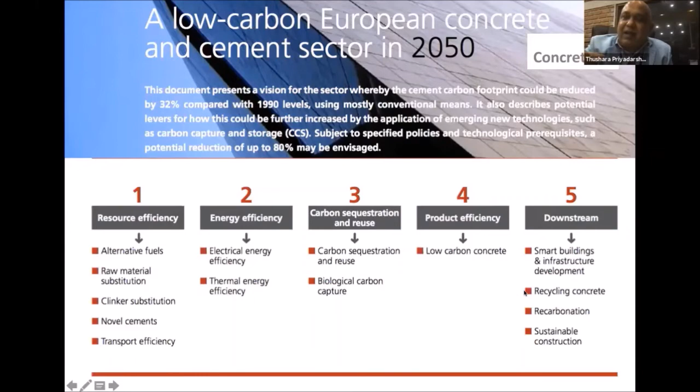Because when you do something, you can again make calcium carbonate. So low carbon concrete, likewise, as structural engineers, you can design it properly. You can use smart material in it likewise.

This is a classic example in Singapore. They have used 20% recycled aggregate to get a green label for this particular structure. So precast will be the future. I think everyone will move into it.

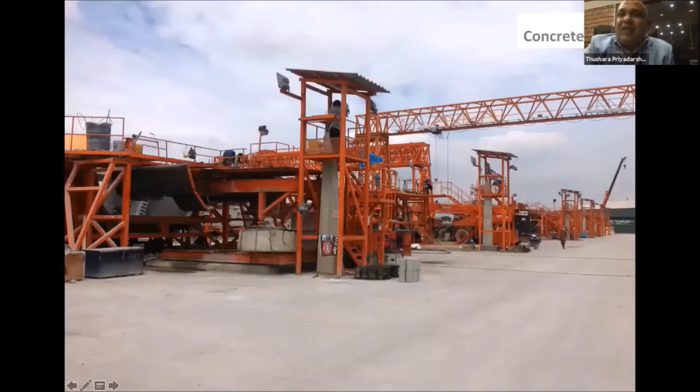What you see here is a precast site, very much similar to our normal site. So this is quite new - prefabricated pre-finished volumetric construction. I think we don't have it now in Sri Lanka, but in Singapore it is very popular. This is an actual site I visited a few years back. There you bring a complete room, including finishing, fitting, everything.

You put it there - this is like Lego. You put it there, do some small concreting and all other, and you fix it. So it looks like this. Complete building - one element, bring it there, put it there, and use it.

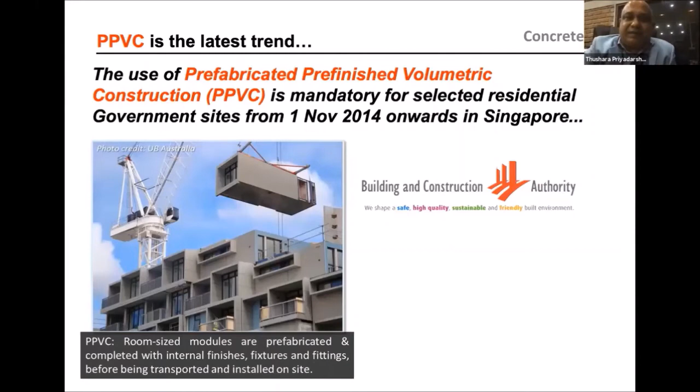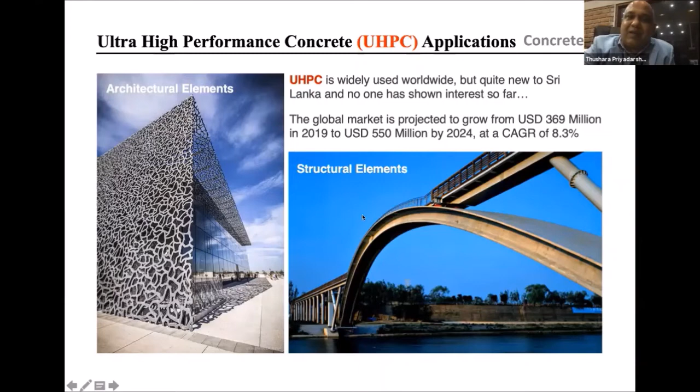Ultra high performance concrete plays a great role. The main difference between high performance and ultra high performance is that for UHPC, the maximum size of aggregate used is 2 millimeters. So this is like toothpaste actually - you make it with fiber, of course, but you can achieve 200 MPa, 150 MPa easily. These are actual structures in the world which can be used for architectural and structural elements.

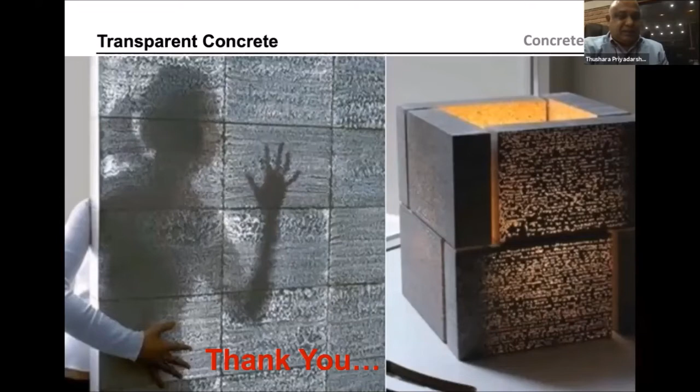So basically now I will handle the discussion time. I think both Prof. Mendis and Dr. Thushara gave a very good insight - Prof. Mendis talked about the past, present, and also future trends in concrete, and Dr. Thushara gave a good overview of the total application side.

So it's up to you now. Professor Mendis is the top, I would say he's number one scientist in the world on concrete - he has been ranked as the 40th top scientist in the world. So we have a very eminent personality. And Dr. Thushara also has been in the cement and concrete industry for a long time with the top cement suppliers, and now he's a senior lecturer at Open University.

So it's time for you to get the maximum out of this session. Let me go through the chat and see the questions. Mr. Sharmal, very sorry to interrupt, but I have answered some questions as well. Yes, Professor, and giving answers, yes, sure. We'll start from the last - you have already answered the question. Yeah, just to save time, I answered a number of questions.

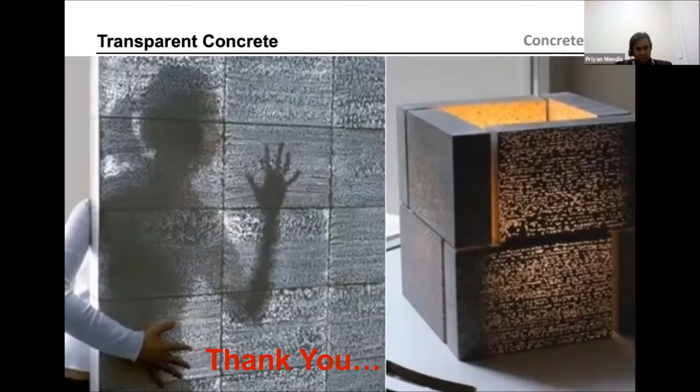So this is the change done. I remember fly ash came in the 80s to the world. We have to give a lot of thanks to Dr. Malhotra from CanMet, who pioneered the use of fly ash, and then it came to the world. In terms of waste materials, the beauty is fly ash brings lots of positive qualities - they're not just a waste material. There's durability improvement, workability improvement, and many other advantages. So using a waste material, if you can improve the properties, that's so-called upcycling - we've gone beyond recycling now. Upcycling is using the positive properties, that would be really good. That's the sustainable type of concrete.

Now, there was a question in the chat. I said I'd answer it verbally. Quantification - that's quite a good question. We will see life cycle analysis being done for quantification more and more. Sometimes it's difficult to quantify, but today I won't be able to answer everything. Embodied energies - you can read about that to make it a bit more sustainable.

Other sustainable aspects - waste materials is key. Now we were only used to fly ashes, slag and silica fumes as waste materials. Now in a big way, other waste materials are coming - what we throw out, like plastics, glass, paper - if we can use that as an advantage in concrete, then I think that becomes sustainable.